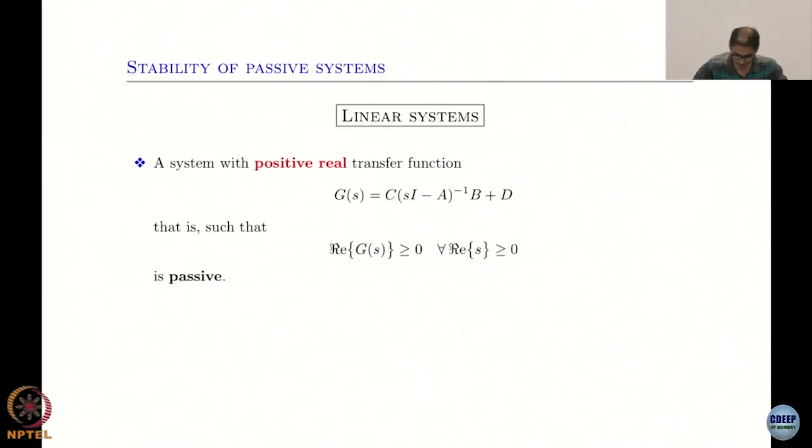If you remember, he started off talking about all this energy balance, which is actually the real motivation for passivity. If you looked at how he discussed passivity, you would understand that almost every system you can think of can be thought of as a passive system if you don't keep injecting too much energy into the system yourself. And if you are very careful about choosing the inputs and outputs, that is the only real trick here.

Input is anyway typically fixed. You can't really decide what is your input of the system, but you can always try to determine an output with respect to which you will have passivity.

So the basic equation was just this: the energy available is the initial energy, and then there is some dissipativity and supplied energy. So this is essentially what this is.

If you look at this sort of expression, the way he talked about it is that the energy difference, if you take this to the left hand side, is less than equal to some inner product of input and output. Essentially that's what it is. This could be any input output, right?

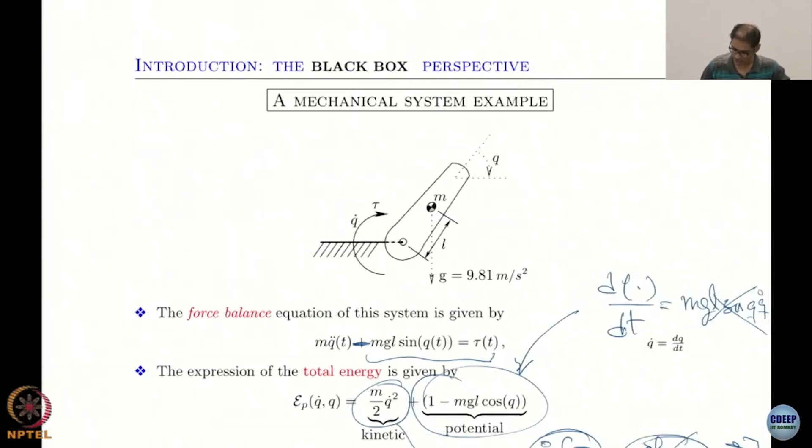So the definitions that we talked about are not different. It's just that he came from a different motivation, and then we looked at several examples, and probably you got confused. I have no idea where you got confused, but that's essentially what it is. It's simply just the motivation is pretty much simple.

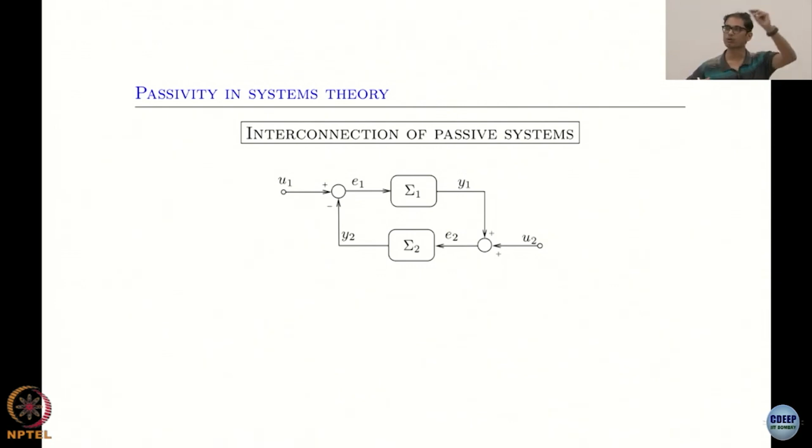Then of course he talked about these very useful concepts, that this is why you can keep extending this notion of passivity to larger and larger systems. You can add interconnections. Essentially what he said is that if you interconnect two passive systems, then you retain the passivity property, and this is a pretty cool thing.

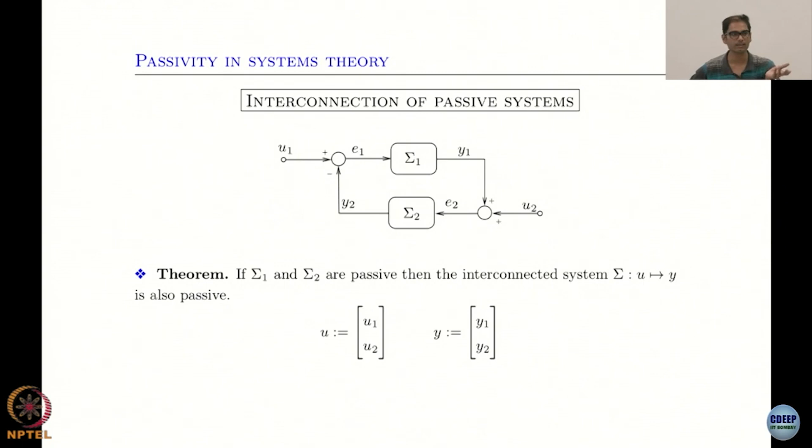Because we also discussed, if you remember, that if you have passivity and the zero state observability, which you already defined, then you can actually design a controller very easily, which is a function of just the output with respect to which you have passivity. So we discussed this, right?

This is basically: if the system is passive with some storage function and it is zero state observable, then any feedback of this form with these properties globally asymptotically stabilizes the system, the origin. So it's a very cool thing, right? So for passive systems, I have something nice.

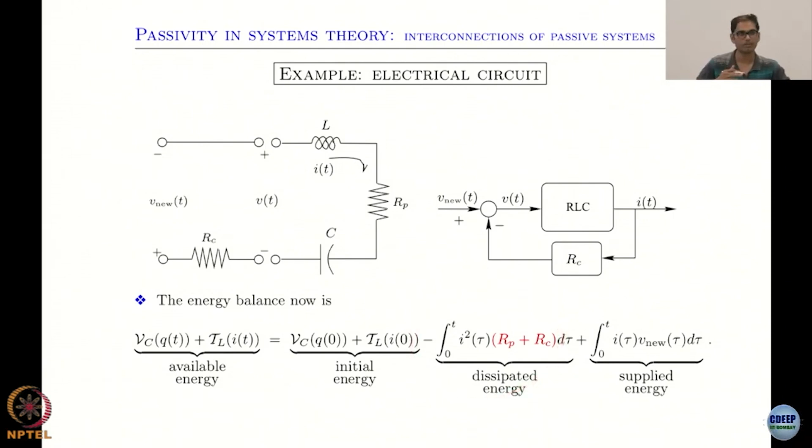So in this Khalil's text or whatever I am covering, I am always talking about passivity. If you notice, Antonio also spoke about strict passivity, by the way, where you have actual dissipation happening. If you have actually a dissipation happening, then it is strict passivity. Otherwise it is just passivity, which is, I mean, either of them is good enough.

Why is either of them good enough? Because I can always use the feedback term to introduce this strict passivity. So that's a pretty, the transition from passivity to strict passivity only requires me to introduce some, it is as good as introducing a negative definite term with this feedback.

See, V dot is less than or equal to u transpose y. If I make u some negative function of y, you can already see that it gives a negative term here. So I have some dissipation, and therefore I get to the strict passivity version. I can always say my control is some new control minus a function of y, which gives a negative definite term like y transpose y, and another control v transpose y with respect to a new control v. So I will have strict passivity with respect to the control v and y.

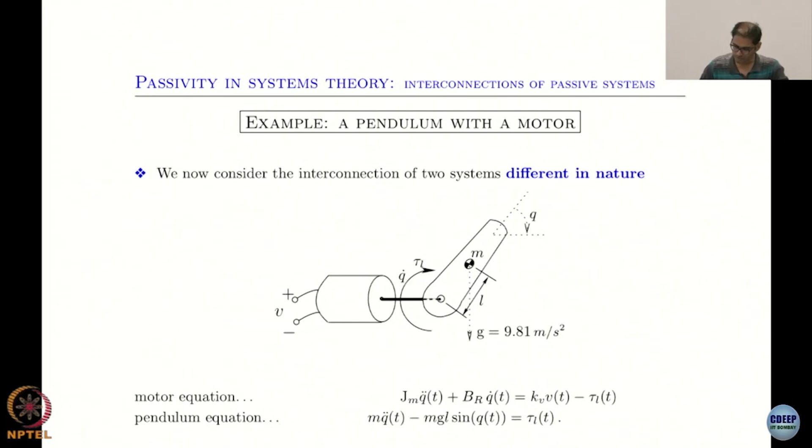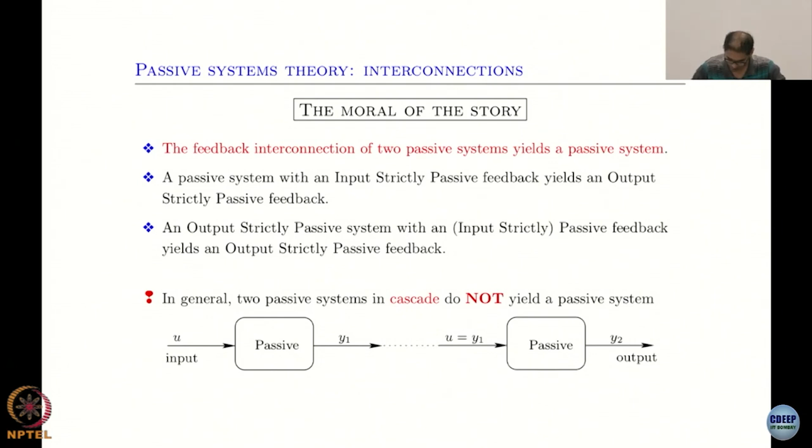So whenever I do a feedback interconnection of these passive systems, I retain the passivity property, and that is a very powerful result to have. But of course he mentioned that if you are in cascade, it is not necessarily passive, but let's not worry about that. I'll let the TAs get into that stuff. This material was a little bit more involved because of how it's stated, not actually very complicated, just more involved in how it's stated.

Okay, so this is again the same idea. You have feedback interconnection of passive systems, so you retain passivity, which means inherently that I can globally asymptotically stabilize some system equilibrium. The only question now is, what is that equilibrium? Because I connected two different systems, one system could have one equilibrium, the other could have another equilibrium.

And in energy terms, this is the same as, so this is very well known, that equilibrium, when you're looking at systems which conserve energy, or Lagrangian Hamiltonian systems, equilibrium is just the minima of potential energy. This is standard, remember this even if you don't understand it. It's almost like saying I have my potential energy like this, and this is where my equilibrium is. You may not have seen this, but for mechanical systems folks, this is the standard idea, that equilibrium is actually a minima of the potential energy of the system.

You can think of it, if I drop a ball, what is the equilibrium? It is the ground, where the potential energy is zero. Systems want to minimize their potential energy. That is why turbines, whatever, everything works because of that. You drop water, it goes down. Basically all systems work like this. This is nature, nature's equilibrium.

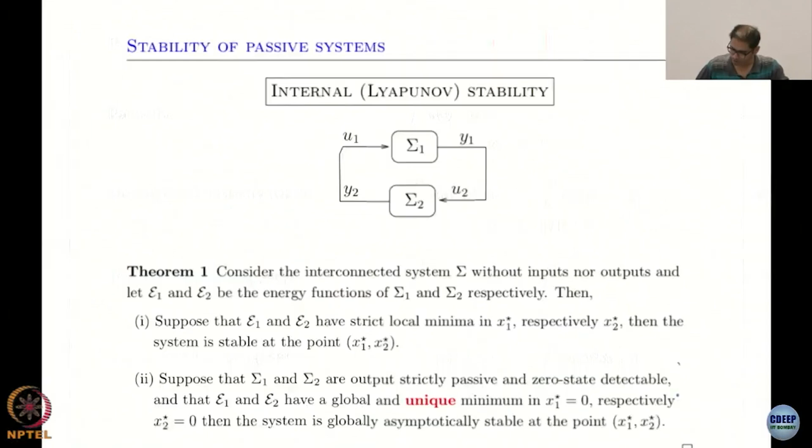And finally you have state strict passivity, where this dissipation is now a function of all states. This is obviously the strongest sort of result. And this beta thing, he used this notation beta, but actually it is the energy available, like E(t) minus E0, or V(t) minus V0. If you want to think in terms of Lyapunov function, it's V(t) minus V0. We've used the Lyapunov notation because we're used to it. That's about it. There are pretty clean connections here. So don't worry, don't think he suddenly went into something too crazy or new. He did not.

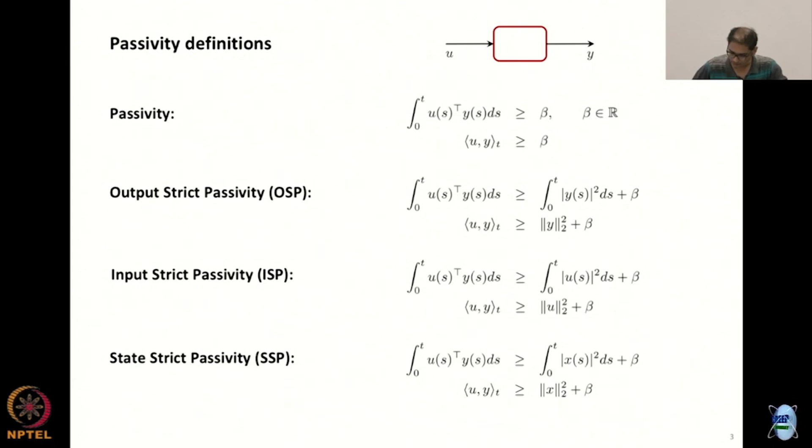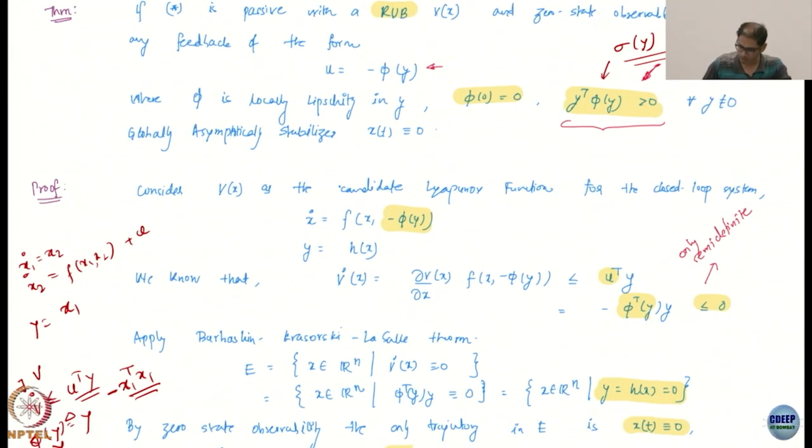Okay, I will go forward here. We saw multiple notions of getting to passivity, right? Of course you may not be able to start with a passive output, you may not have one, or you may not know one. Though the first is, if you do have a passive output, we already proved that you can get this nice feedback, and zero state observability will ensure global asymptotic stability. Great, we proved this result. So the first obvious thing was choosing carefully an output so that you have passivity, right? So that's what this is, right?

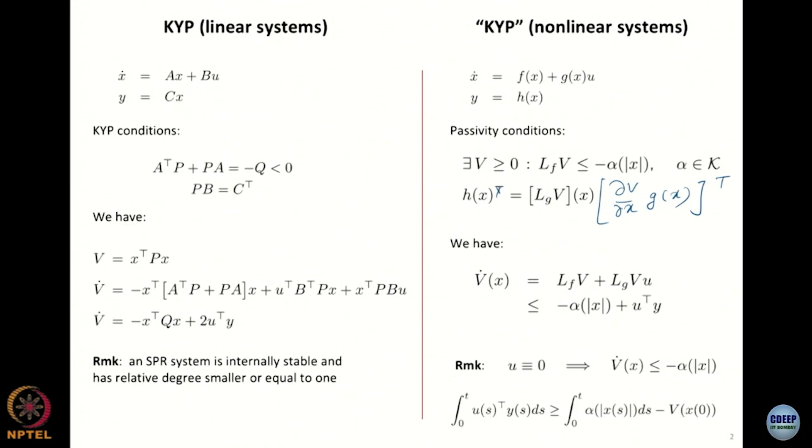In fact he also has this. If you remember, he talked about the KYP lemma for nonlinear systems. That's exactly this: output is chosen as partial of V with respect to X, and then there is a transpose, right? LgV is nothing but, so if I take the transpose to the other side, what did we do? Just look at this, exactly the same thing he said. G is what multiplies the control. This is how you choose the output that will give you passivity, that's exactly what he said, yeah here, exactly what he did.

Yeah, because as soon as you do this, you will get V dot as minus alpha(x) plus U transpose Y. This is actually state strict passivity, right? Because this alpha is now a class K function, so it is negative in the state itself, not just the output or the input, it is actually negative definite in the state, because it's a class K function. And then you have U transpose Y, which is what you wanted, right? Because you chose Y as this, you chose an output.

It may not be a real measurement or anything like that. We discussed this, it may be some fake, unreal quantity, but the purpose here is just to design a control law. It's not actually to focus on what is this Y, so don't try to think of questions like why this is not a real measurement, how are you even going to measure something funny like this. You're probably not. This is just a way of designing a control. We figured out an output Y so that you get passivity.

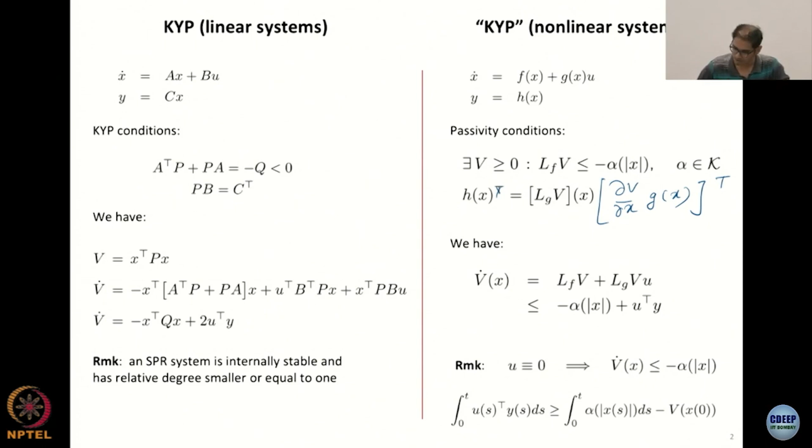So this was the first method of inducing passivity, remember, by output selection. That's what we covered, okay? And that's what he also covered when he spoke about the KYP lemma for linear systems and the corresponding KYP lemma for nonlinear systems. No difference.

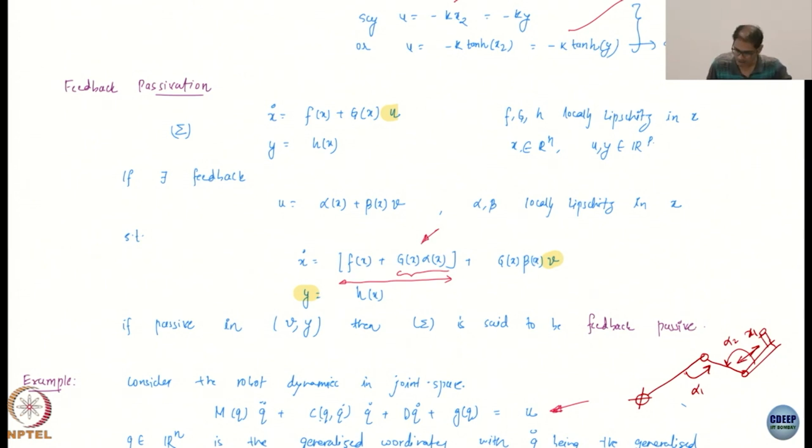Alright, great. Then we went to the important concept of feedback passivation. This was a case where you may not have passivity in the original system, but you construct a feedback so that your system is passive in the new input and some output. So in such a case, you are already given an input and output, and you are claiming that there exists such a feedback such that if I plug in this feedback, and notice V is the new control, I get this system. And the claim and assumption is that with this V and with this Y, the system is passive. This is the assumption.

Then you know that the system is feedback passive, and as soon as you get passivity with this new control V and Y, you are done. You can again apply the same theorem, that the control V can now be some function of Y, and you will get global asymptotic stability under some simple conditions. So this is what was feedback passivity.

Where did he cover feedback passivity? That is where you guys got super lost. This is where he covered feedback passivity. He considered a special case. Not he considered, but that's where Kokotović and Sussmann started. He considered a simpler case.

If you see, here there is no output yet. There was no output at all. Whereas we already said there is an output, and then we construct a feedback so that you make the input-output system feedback passive or passive. There is no output here at all. How did he go about it? He first said, let me decompose this guy in this form, that is, it is somehow linear in some output of this system.

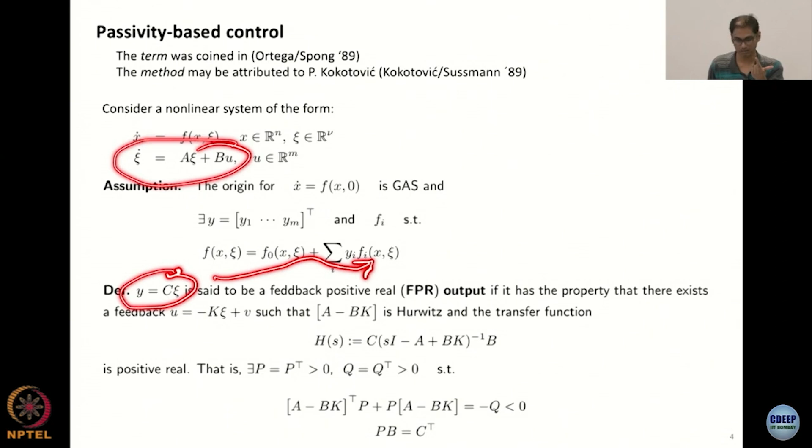Because C is what governs the output you decide, and K is the feedback. So basically if you have these two conditions, it guarantees that this system is passive with this output. And not just that, this output allows you to linearly specify or linearly parameterize the drift or the dynamics of the X system. These are all assumptions.

So that's why I kept asking him, oh God, these are very scary assumptions. Where do you even get them satisfied? Yeah, but that's why he actually showed an example of a robot system where you can actually have these assumptions.

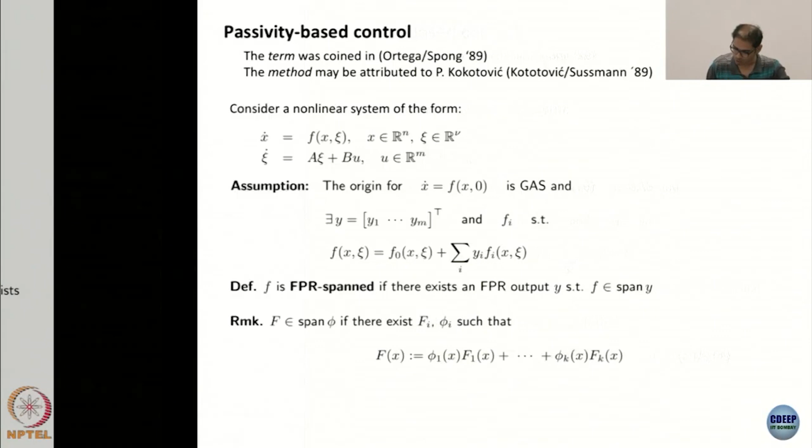And these definitions, FPR output, FPR spanned, all this is just to say what I just said. Nothing, these are nothing special. So then FPR stable decomposition, basically all that is saying is that you are able to decompose it.

You have the linear system with this Y to be already passive. On top of it, you are saying that if xi is 0, then this system F0 x0, x dot is F0 x0, is actually globally asymptotically stable already. So several assumptions that are there. This system with xi equal to 0 is already asymptotically stable. Under these assumptions, you are designing a control U to stabilize this whole system.

All right, so what have we assumed? That the linear system with some output Y is globally asymptotically stable. Actually, I think there was an error here, this should be F0, this should not be F. The linear system with the output Y is passive, the nonlinear system can be decomposed in terms of the outputs of the linear system, and the drift of the nonlinear system is globally asymptotically stabilizing if the linear system states are 0.

Under these assumptions you can design a strict passive control and so on and so forth. I'm not going into the details of this. It's complicated, it's confusing, not complicated, but it's essentially doing what I'm doing. I'm also saying the same thing in a more general setting actually, in a slightly more general setting you're doing the same thing.

What they are doing is also feedback passivation. The only difference is they also have, see, why they say it's a cascade is because the passivity is only assumed on the linear system, and then there is a nonlinear system which has no control in it.

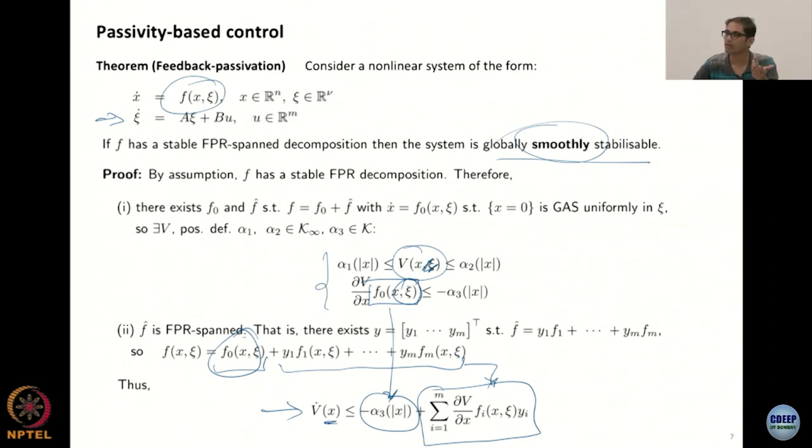The nonlinear system has no control variable at all. So where does the control for the nonlinear system come in? It comes in through this guy, you can think of it as coming through this. But then you are also assuming nice things on the nonlinear system already, that this is somehow stabilizing.

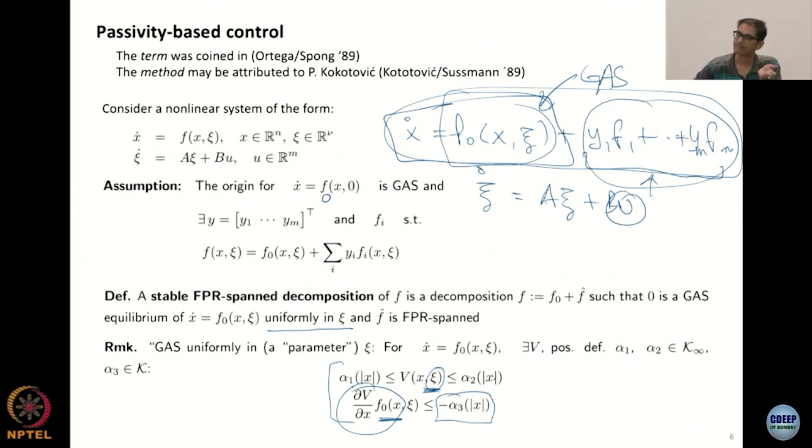And then you have this. So this is why it's called a cascade, because you're connecting a nonlinear or linear system in cascade to a nonlinear system. This is not a feedback interconnection, it's actually a cascade connection. I think he used the term cascade somewhere. This is cascade, because the output of this system feeds into this system.

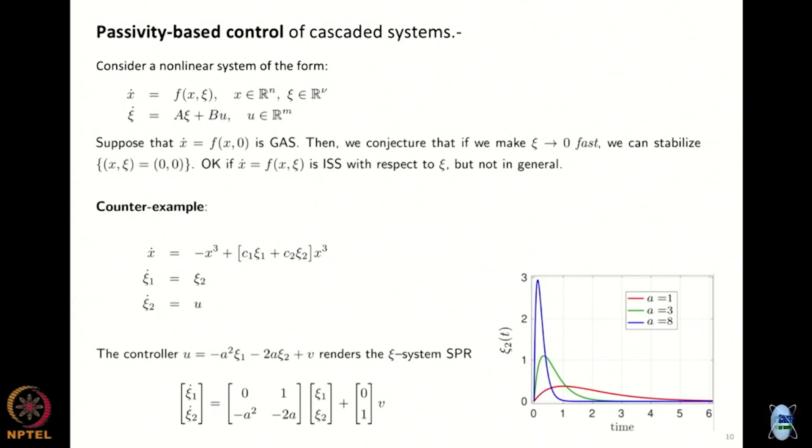Because this f(xi) is basically the summation of f0(xi) plus the summation of yi*fi. So this is actually in cascade. Cascade means the output of one goes into the input of the other. Feedback is the circuitous route, right? Output doesn't go directly, so there is a cycle there. Here there is no cycle. If you notice, the linear system is not getting any feedback from the nonlinear system. It is free of the nonlinear system.

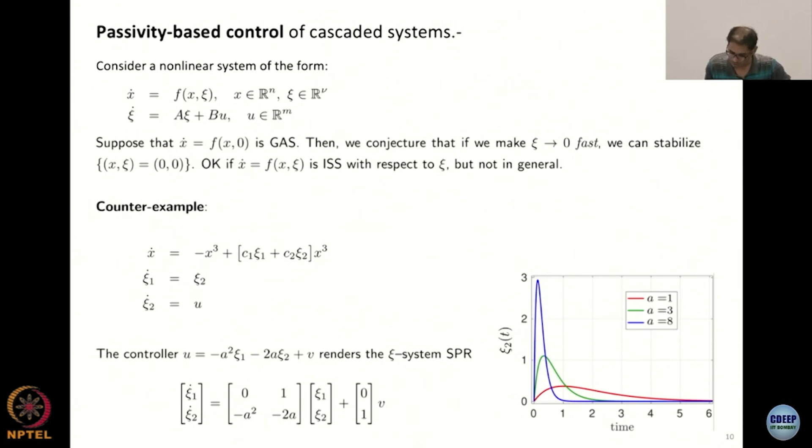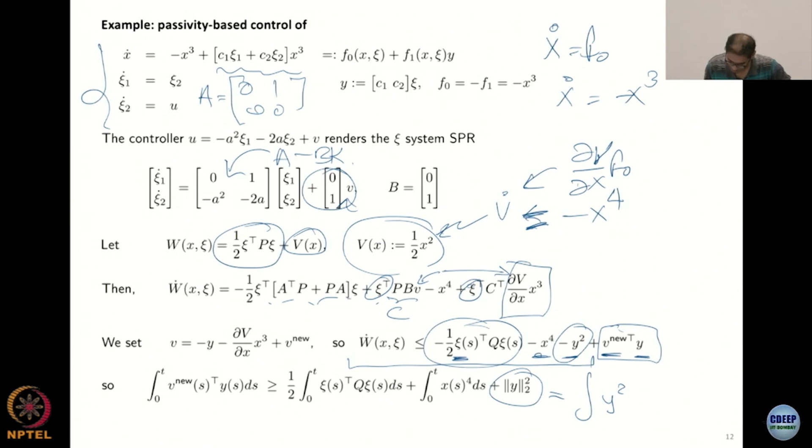So what does he do? He says that if you have all the nice assumptions, the basic conjecture is that if you can make xi go to 0 fast enough, then you can stabilize. Okay, actually this is a counter example, I apologize. So basically, in this example, all he does is, let's see, he has a stabilizing term. Let me try to point it out. I know this is getting confusing.

Yeah, this is easier. He makes it into a sort of feedback interconnection just by the way he designs the controller. If you see, for the linear system, he constructed a new feedback. The original feedback was U, correct? So he said U will be minus bk plus v. This is like the feedback passivation type thing that he's doing. And that minus bk went in here, and then the v remained here.

And then what is he going to do? He is going to set the V as this guy. What is this term? Do you understand what this term is? Why do I set V as this? What is this? We just saw this somewhere in output passivation. It is just, if you think of Y as the control, it is exactly LGV. If you think of Y as the control, this is exactly LGV. So he is essentially setting this to that.

Once you have passivity, you are just choosing the correct output, right? And he chose this as his output in some sense. So he is just setting this V as an LGV type term. Here it shows up in the feedback instead of showing up in the output, because you are doing this feedback passivation type thing. But if you see, the structure of these things is exactly what we were doing, exactly LGV if you assume Y as the control.

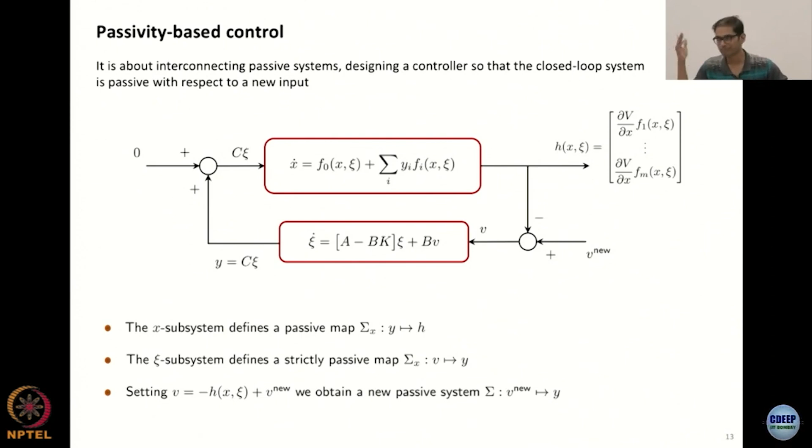You have a nonlinear system with which you have a linear system in cascade, and under several assumptions, you get this passivation. Here we had a slightly simpler setting. Let me see, we also get to the next step, by the way. I think we also covered this robot example a little bit, and I think we were somewhere here, and then there was this exercise.

Anyway, the exercise will be set today, and you will now have numerical exercises, in the sense you will have to do some simulations also now, because you have a robot. You have to make the robot move. Not experiments, just simulations, don't worry.

If you notice, the next step was exactly this, cascade connection with passive system. This is what we are going to look at now in our context, which he presented in the last lecture, so we will look at it again.